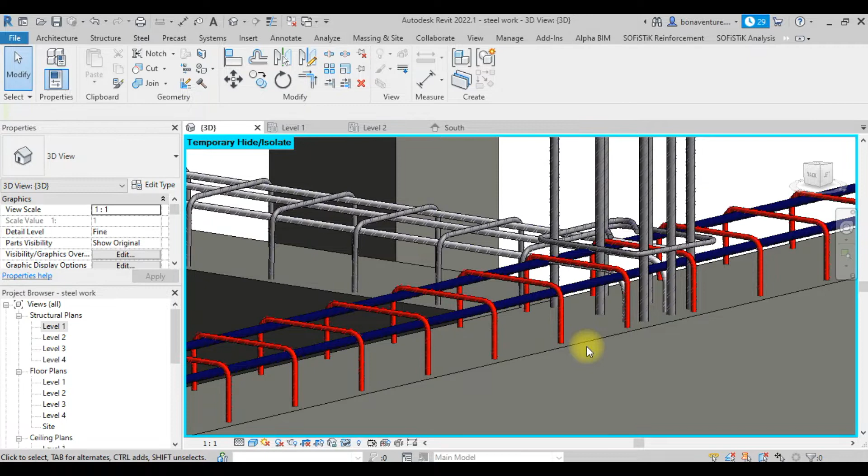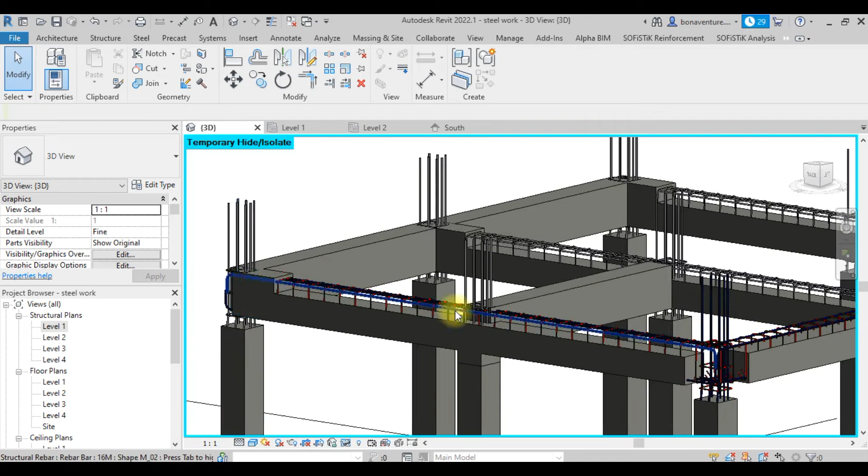Hi guys, in today's tutorial we'll be making use of Revit 2022 and we will concentrate on how to solve rebar visibility problem. Okay, so let's start. We have already modeled this particular little simple structure, so we now start afresh to make another model of this structure, you understand, and then try to know how to make these rebars visible as it is like this.

So let us open a new project. Control N. Okay, structural template, yes.

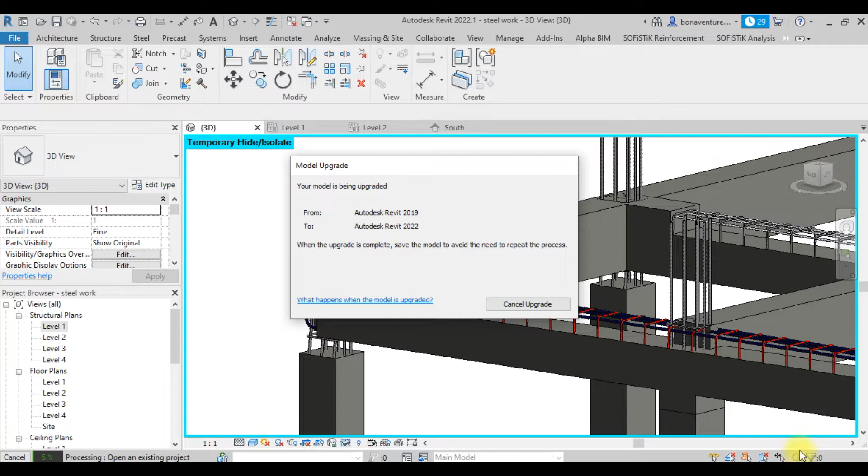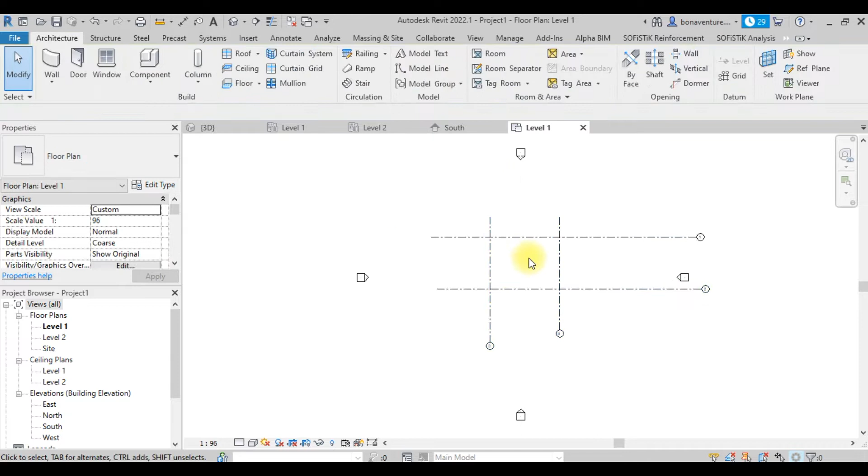So we'll now start with grid line, just a simple grid line. Grid line, come up. This, maybe another one, this, then this, okay, this. Very fine. So I don't know the dimension of this, let me make this 3000. Enter. Then this also 3000.

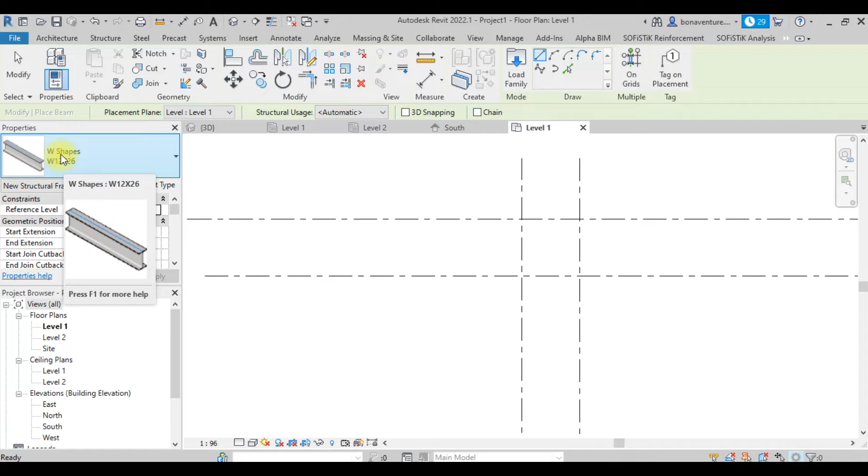Okay, enter. Now I don't need to be setting my levels, I'll be making use of this level 1 and level 2 only. So what I will now need to do is, I already know the beam I have here, they are the automatic beam, they are the default beam, so I will be loading in both beam and column, the concrete beam and column.

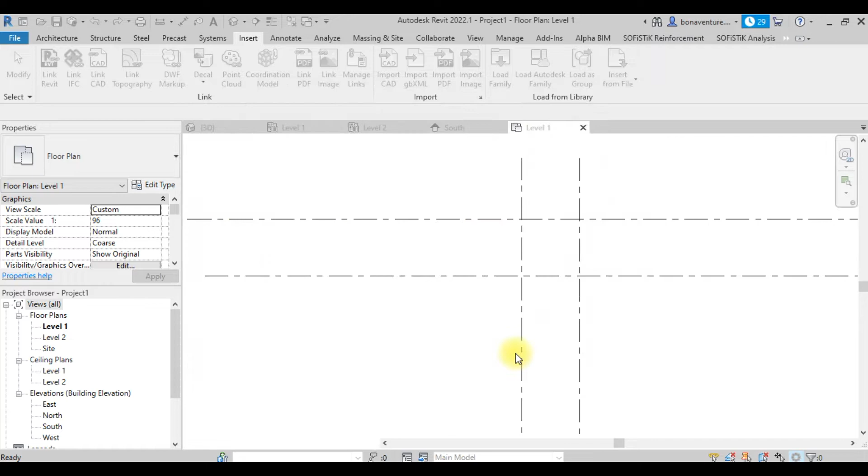So I'll come to this insert load family. I will now come to looking for structural columns, then concrete. Will now come to rectangular column, load it. Then you also come to insert, go back to beam, this structural framing. You now come to concrete, rectangular beam, load it.

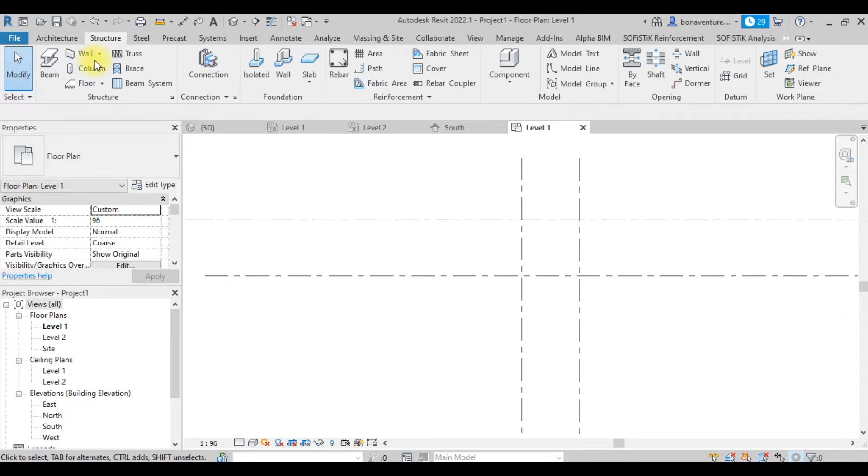So with these two things, I will go straight to put in my column. Okay, this is it. So I will just say at grid, finish. Okay, it's not visible at this place.

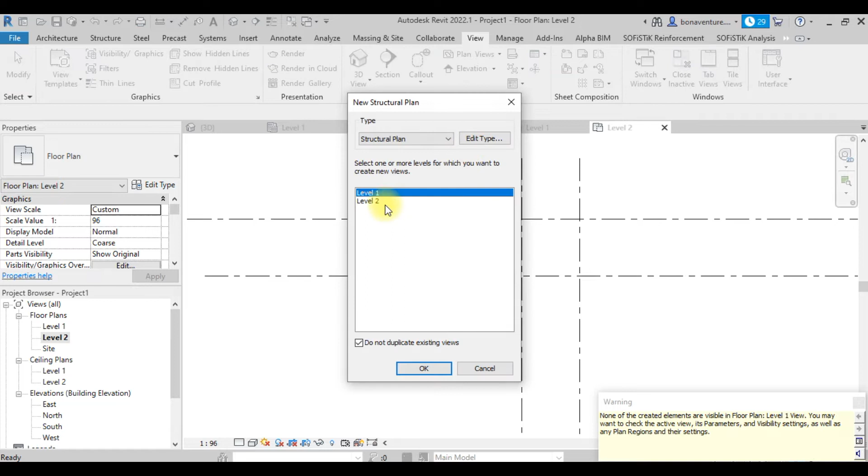So meanwhile, let me open my view, my structural views. So come to this place, you have structural plan. Okay, so select it to open. Now coming under this my structural plan, now we can now view our column.

So I want to just set up the column to be, let me say 300 by 300 millimeter. So say okay, and everything changes.

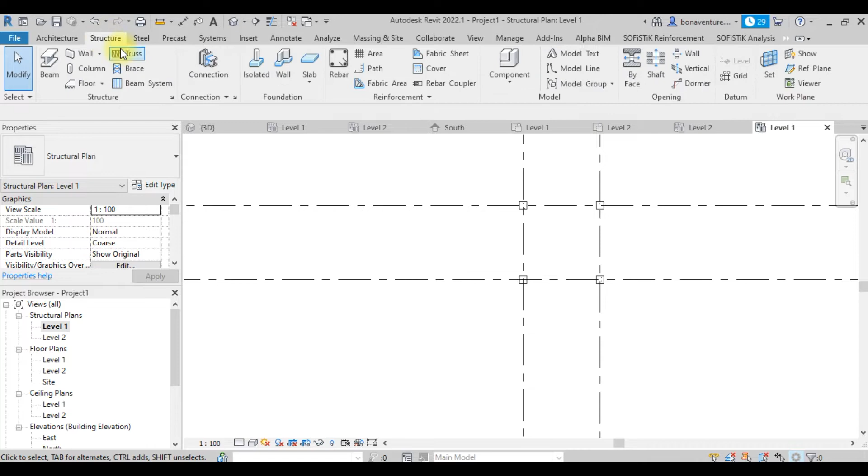So the next thing I need to do is just to put up my beams. So still come to beam. My beam, I want it to be 300 by 450. Okay, so I say okay. I want it on grids, run. Okay, so I'll say finish.

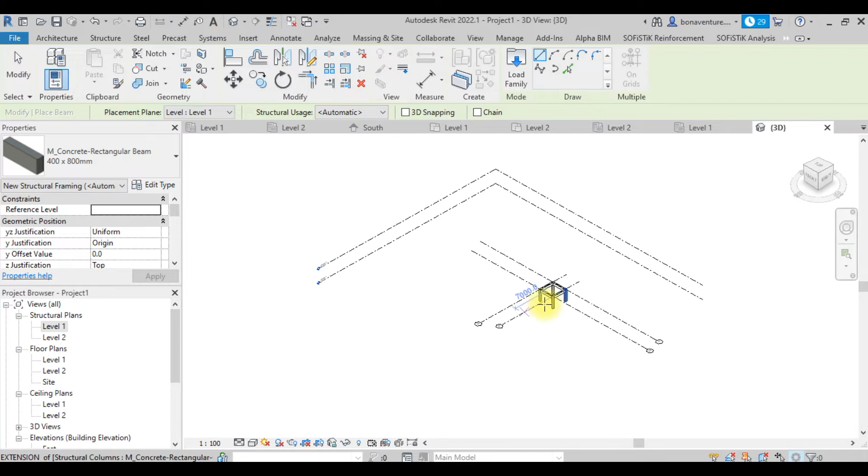So I'll come to my 3D. You now see how my column, my beams and everything has been inserted.

So the next thing I need to do is come back to this. I will now need to put my reinforcement. Now coming to this rebar, okay, I will need to load it.

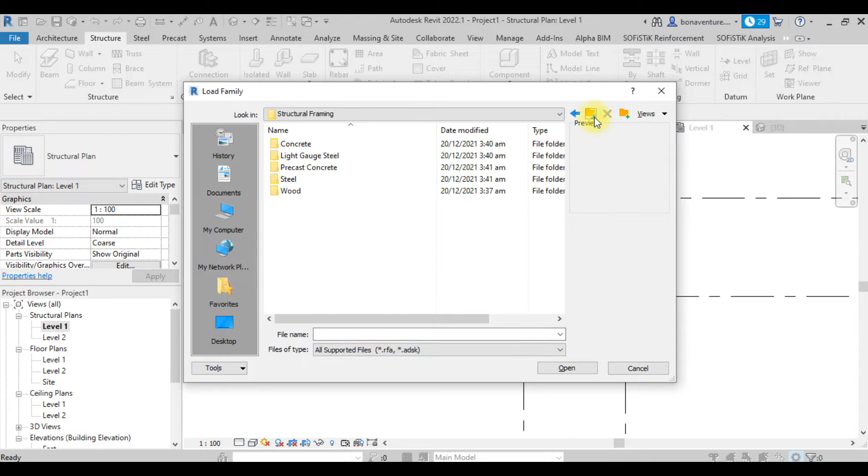So yes, I will now come to structural rebar, structural column, precast, rebar coupler, rebar shapes. Yes, so I will basically load everything. I don't want structural rebar, I'm looking for some, so I will just load everything. Okay, it has finished loading.

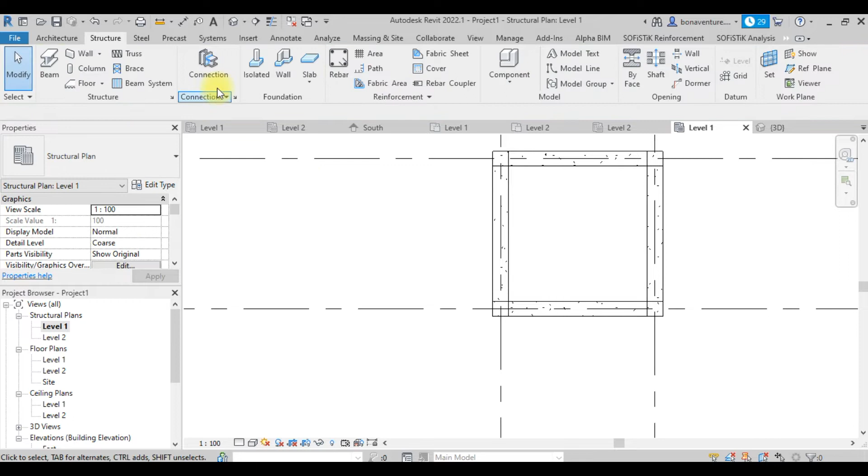So I will start with reinforcing my beams. So okay, escape. Now come back to this rebar.

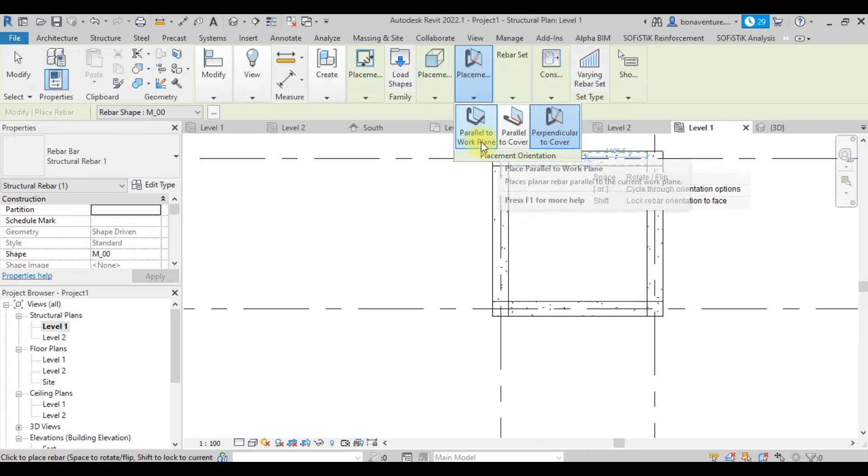Okay, now we have so many options here, and this is not what I'm trying to do, but for the beam, I'll just click here, come to this place. Okay, perpendicular, parallel to cover, parallel to work plane, parallel to cover. Okay, no, this is not it. Placement, parallel to work plane.

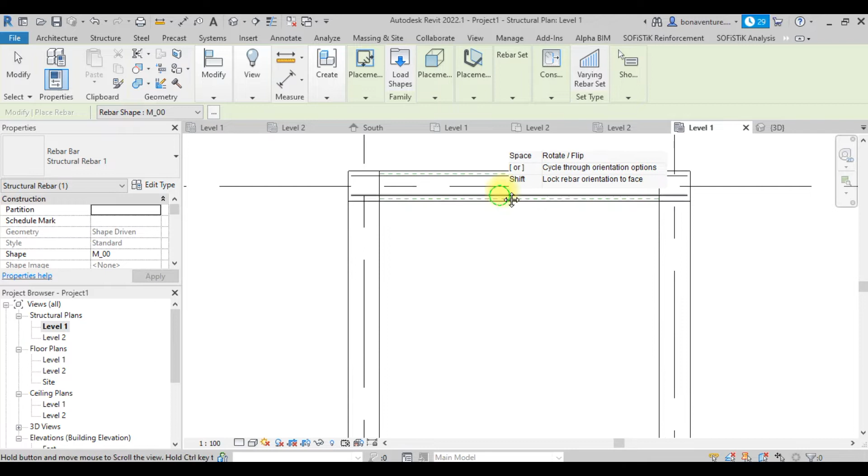Okay, yes. And then remember what I'm making use of is bar shape 00. So I will now come and put here, put here. Okay, let me just use this one for the meantime.

Now if I now go to my 3D, let me drag this out. If I now go to my 3D, put it under shaded, you'll find out that inside is this.

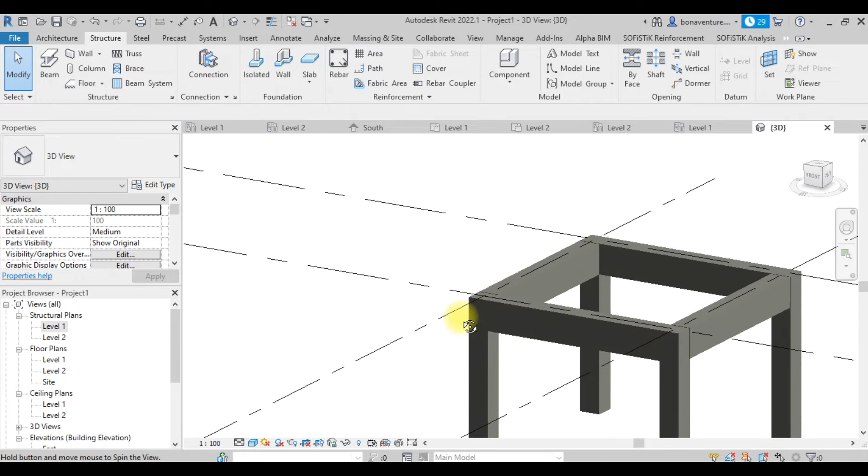Okay, I want to locate my reinforcement. So where is it? You see the problem? Looking for the reinforcement. Okay, look at it here. I think this is it.

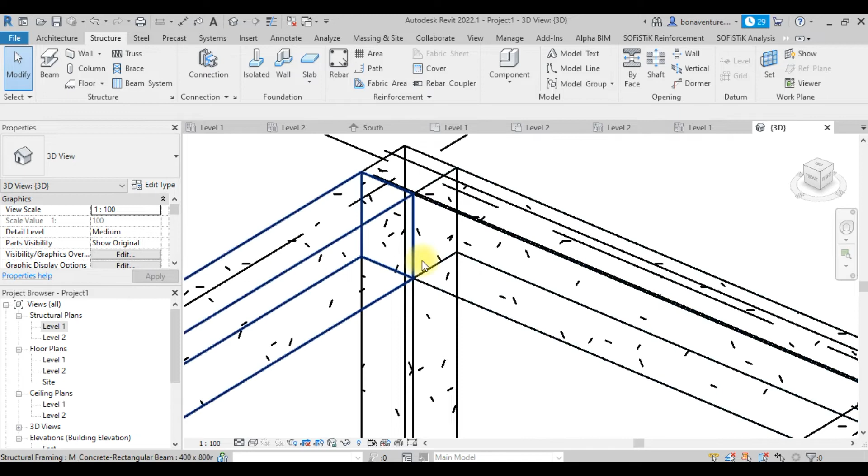You see, so everything just appears as a line, and that is a major problem that we normally see. So this is exactly what we want to solve. So when it happens this way, let me drag this out so that we'll be seeing it well.

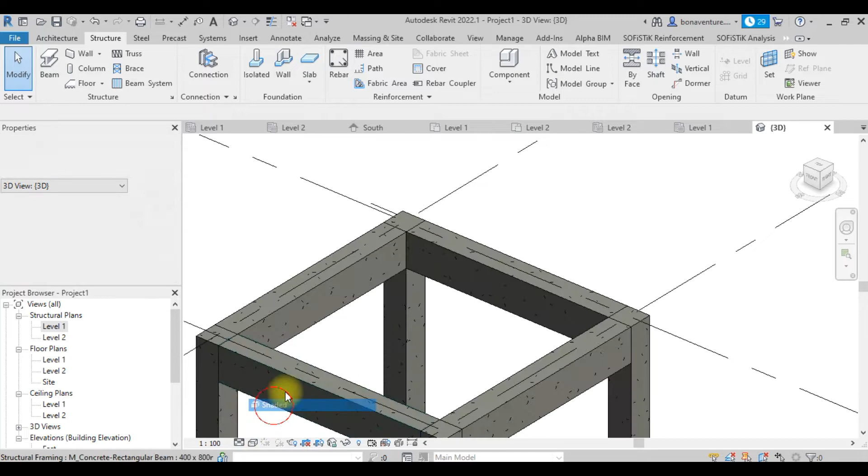When it happens this way, we have three things that we can do. First, let me take this back to shaded. Okay, and then this is the reinforcement. No matter how you zoom it, it will still be like a line.

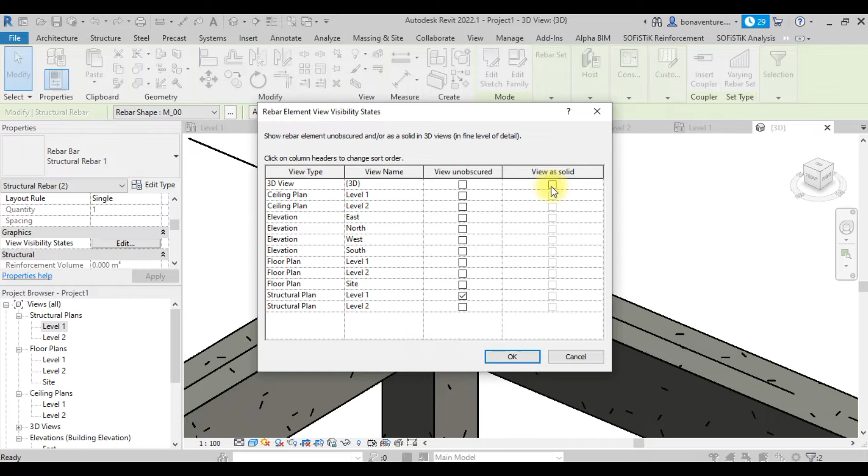So first, I'll click on the reinforcement. Let me just select the two reinforcements visible in view. Now I'll come to this property and look for where we have view visibility state, and I'll click edit. Then I will now click view as solid, and I'll say okay.

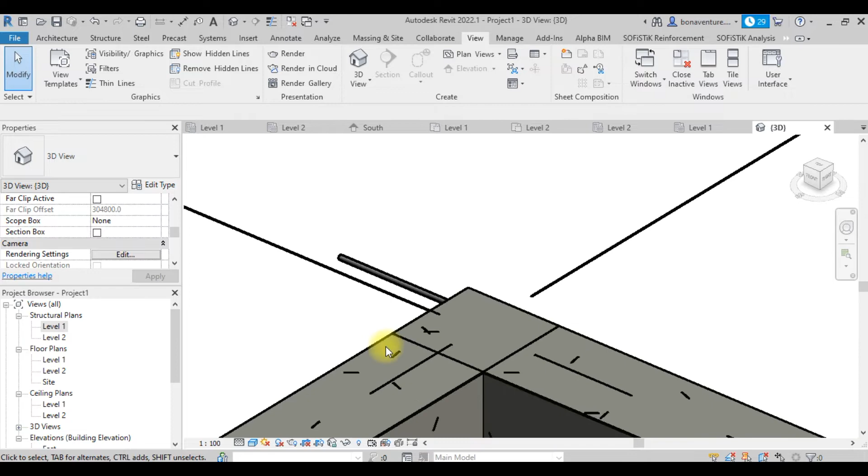Okay, so this one thing. The second thing you need to do for it to come out as the shape you need is come to this place and click fine. Now you see how the reinforcement is looking, but there's another problem. If you look well, the outline of this reinforcement is too thick. So what do we do?

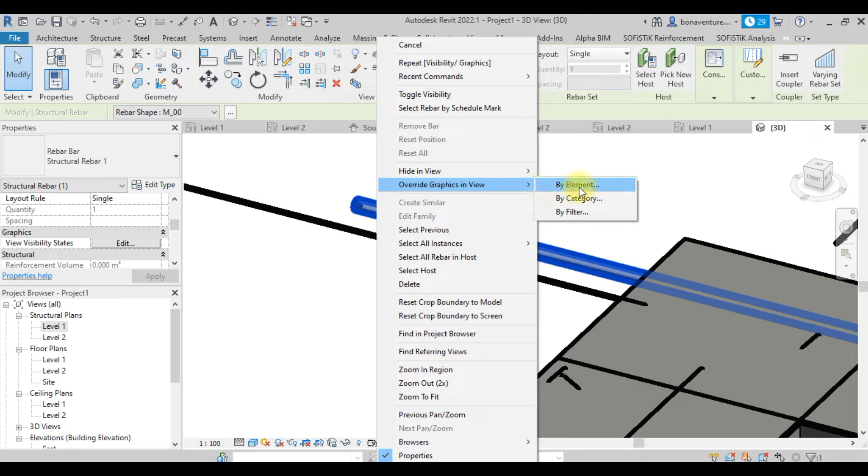What we need to do is click this particular thing, select all the reinforcement, override graphics in view, then enter. Let's start with this by element. If you come to this page, there is what we call the projection line. Come to this projection line, then under weight, go to by object weight, click on one.

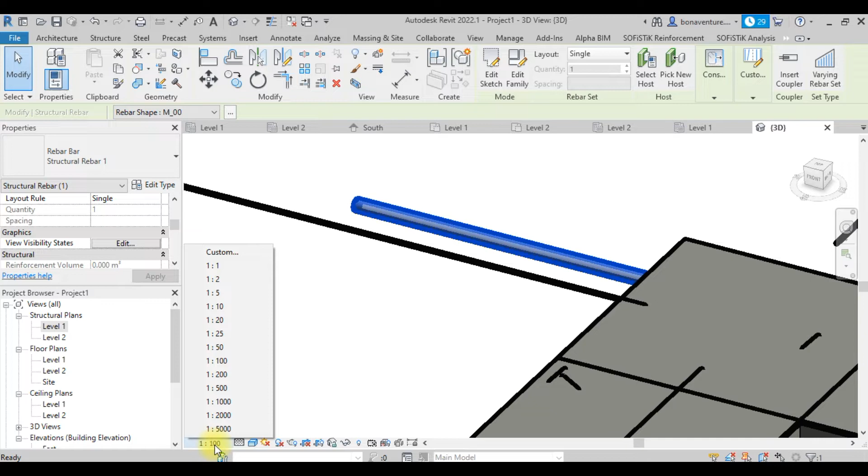Then there's also another thing you need to do, because this is not where it ends. Come under this custom, the scale itself, change everything to 1, and you'll find out that automatically everything will turn very fine, as if it's rendered. So put this under wireframe so we'll be able to see these two things clearly.

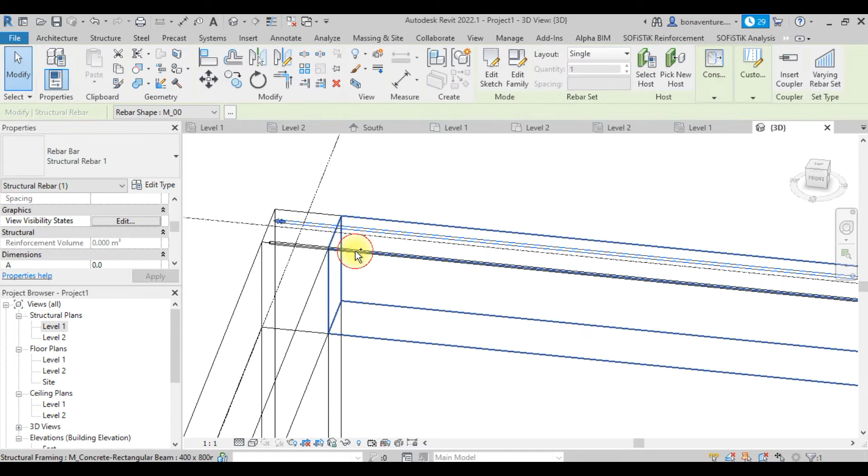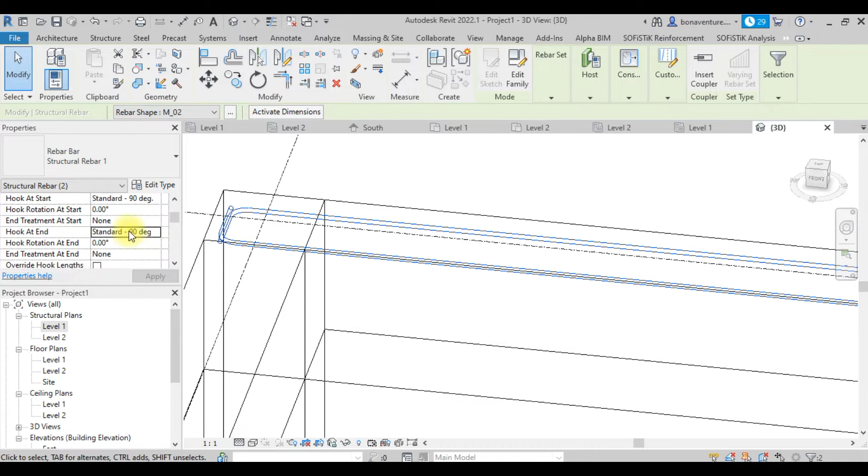Let me make these two reinforcements, coming under here, the hooks, 90-degree standard, then hooks at end standard. Make this 90, make this 90.

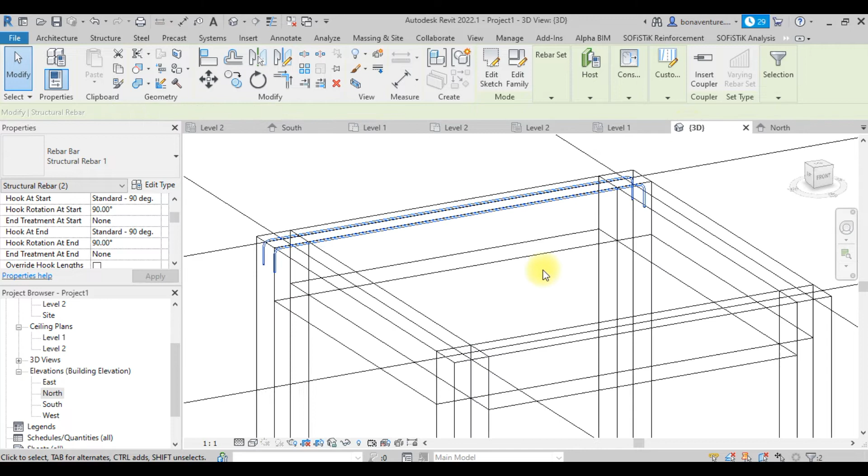Now let me go to north. Am I supposed to be under north? This is west. Okay, go to west, and then make this the same way.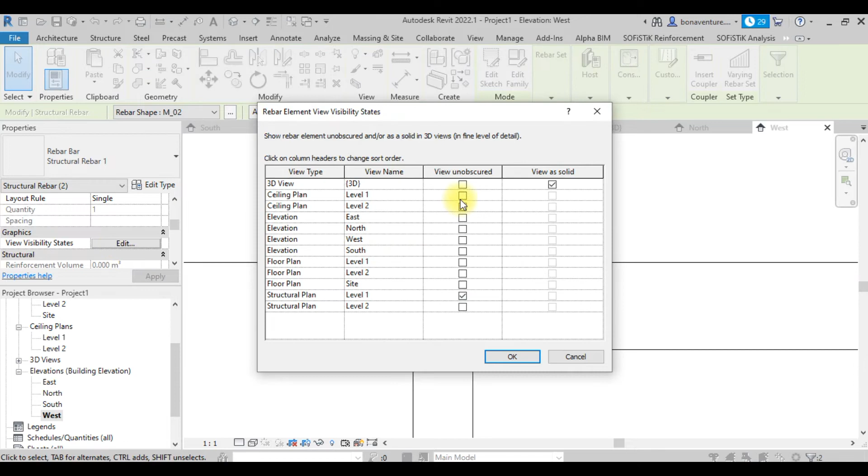Sorry, this is not wireframe, so I'll be able to see the reinforcement. Maybe I can also edit these, still under solid. No problem. Another thing I need to do is make this reinforcement come down, so I'll come under this.

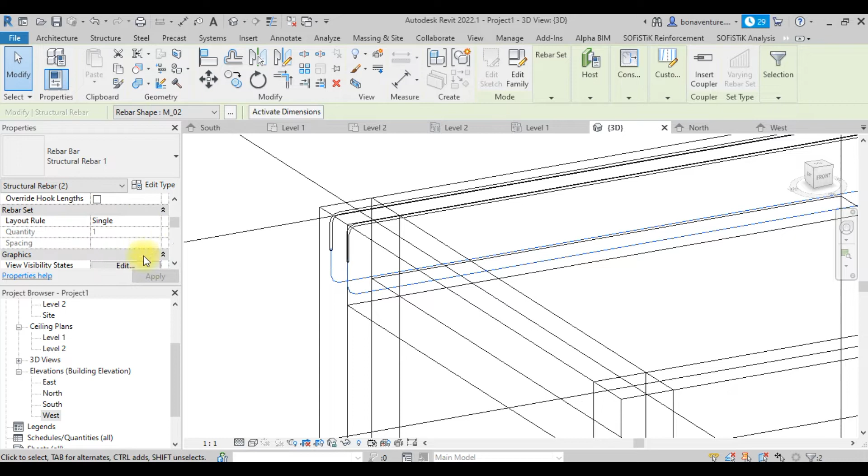Okay, so it's not double. Come back to 2D, 3D, select the two, visibility, click on solid, and then this.

So the next thing, I want to remove this from visibility, this particular one, I want to put it under shaded. So what I need to do to make the reinforcement clear, I'll just click on this, what is it called, face.

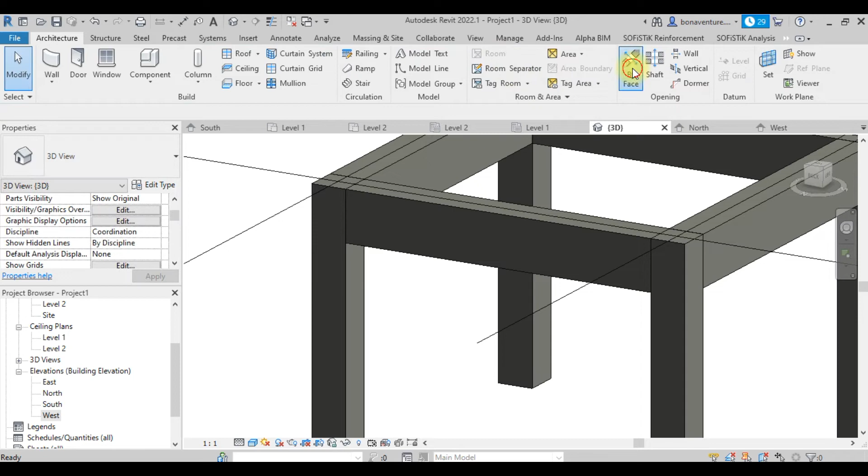So boundary line, cancel by face. I'll pick up this, keep this well, and maybe start from here and keep this way. Okay, I can now see my reinforcement in this way.

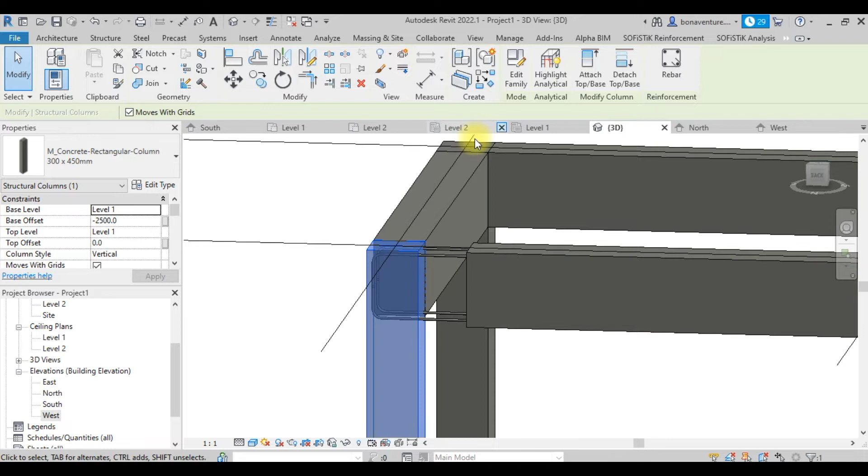Then maybe under this tail also. Okay, let me leave this particular one. So let me put up the reinforcement for the columns.

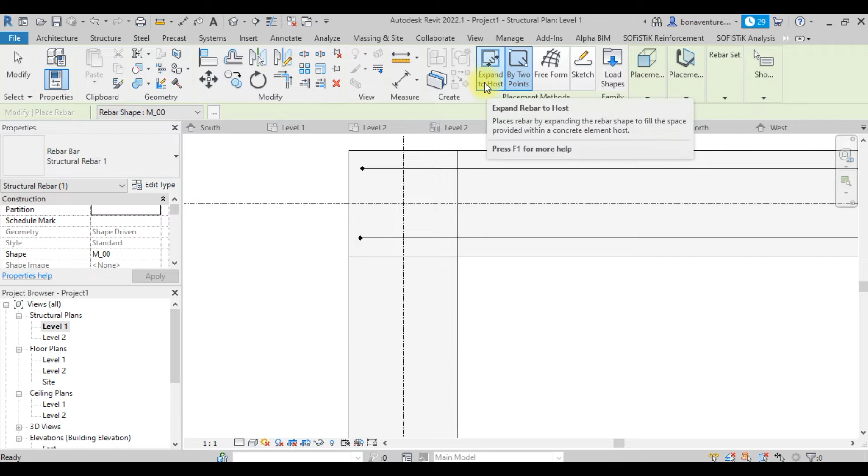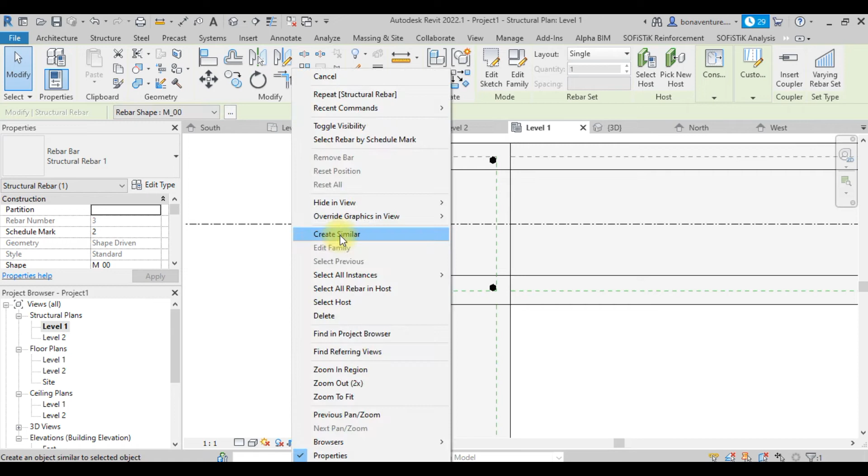And it happened that select all instance visible in view. I want to make all this to be Y16. Okay, very fine. So these are my reinforcements for the slab, for the column.

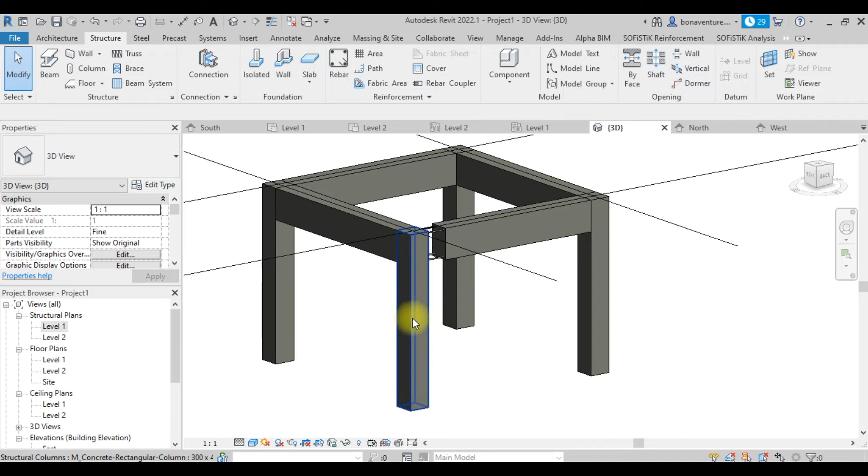Now, but unfortunately, we cannot see it very well. So what we need to do in this case, I think this is where it is. Am I right? Put it under wireframe. Where's the okay? Look at the rebar here.

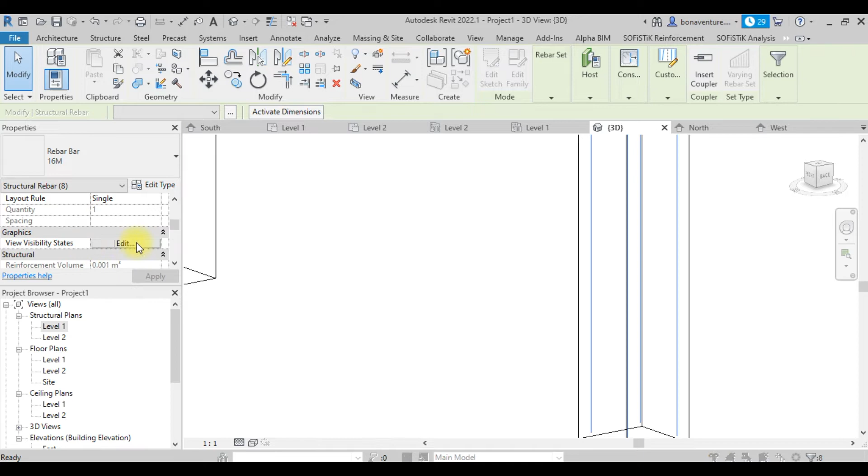So select all instances in entire project, come under here, under visibility states, put it as solid.

Okay, so the next thing I need to do is drag some of this up. Drag them up. Okay, very fine. Let me put it back to shaded.

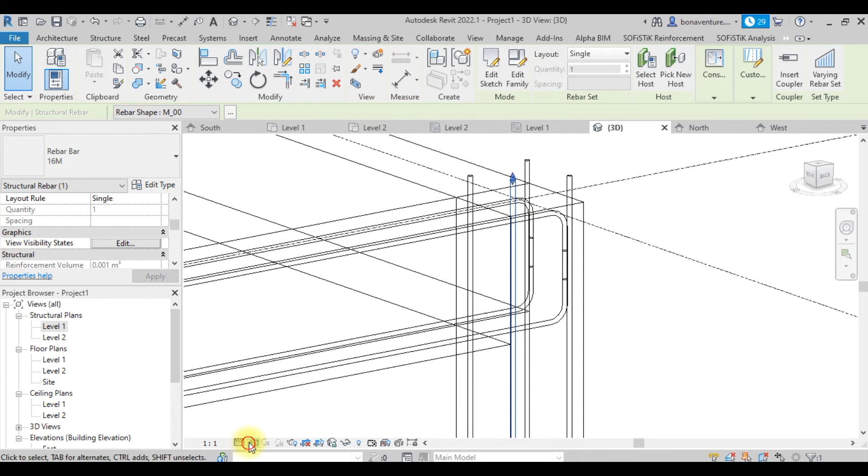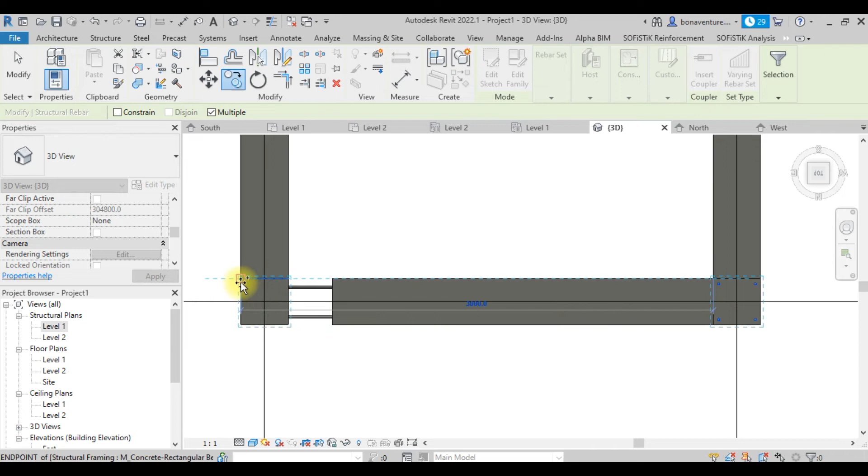Okay, now I also need, maybe let me copy this tray and then place it on this side.

So I also need to select all visible in view. Go back to this place, view as solid. Okay, so with this now we see another problem.

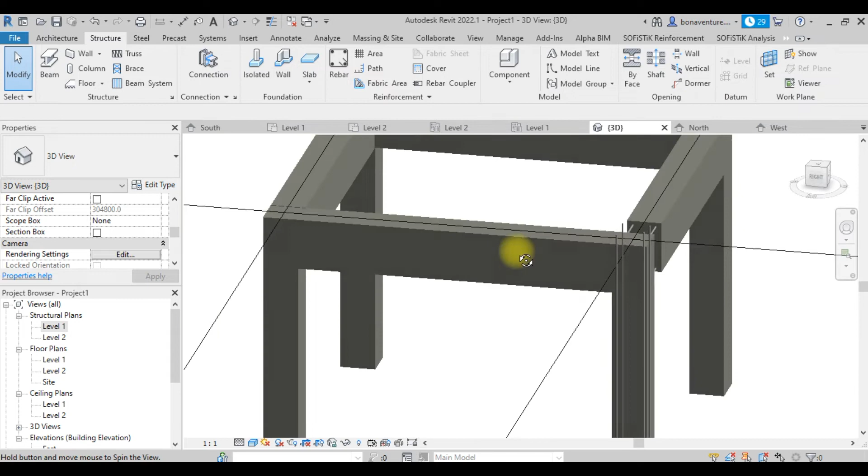You see, the reinforcement is no longer showing as if it is inside the concrete column. So there is another problem that sometimes we normally see in visibility. I want to select all the reinforcement visible in view, then go back to edit, come to this unobscured. Sure, let me go back.

If you click on one of them and come under this place, you find out that this thing is ticked, the view is unobscured. So if you untick it, you find out that it will now be embedded.

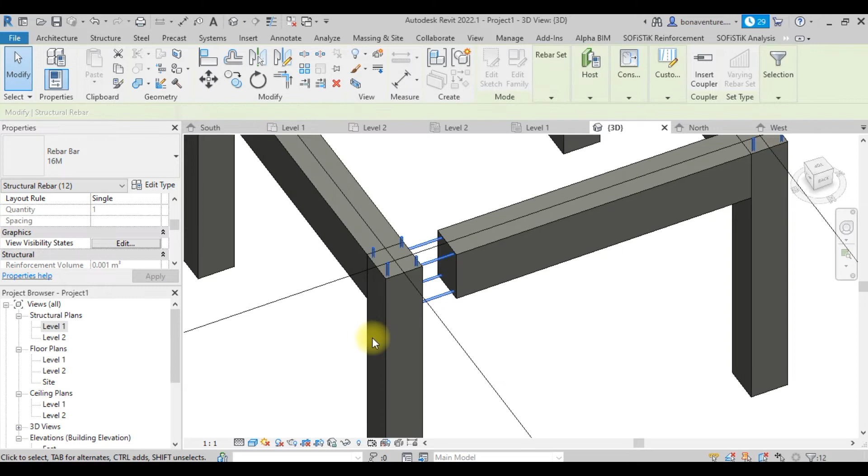So what I need to do is just select the affected ones, or all the reinforcement. I can even select all the reinforcement visible in view, then come under this edit, tick and untick, go back, and enter. So this is another problem that we have already solved.

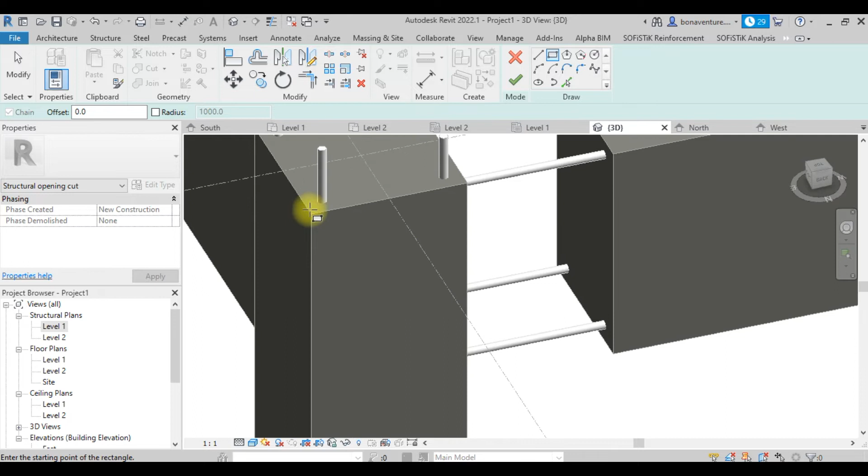So I want to be seeing part of this particular column, the inside. So let's go by face. Okay, so using this, this way, set enter here. I want to be seeing part of this. Okay, go back to our plan.

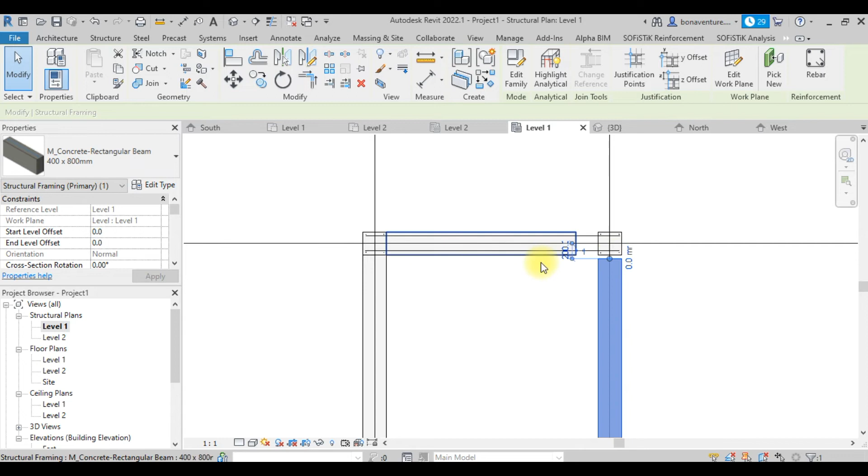So let me just leave this beam this way. I want to be seeing this reinforcement here very clearly.

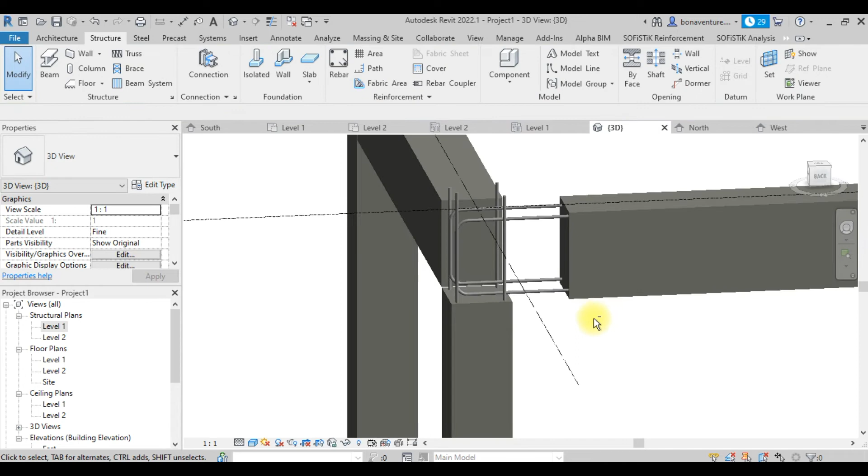Okay, what is it? Part of my beam, edit. Okay, so now these are my reinforcement. I see how clearly it is showing. So let us put in our, what is it called,

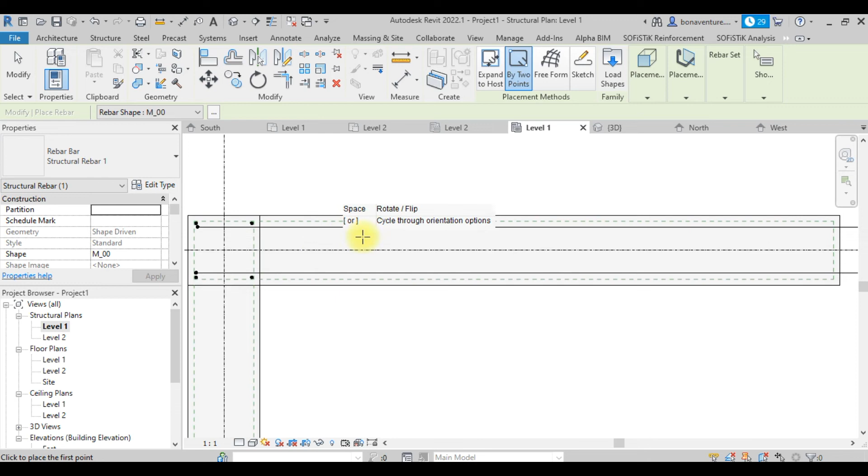our stirrup, by points, okay, parallel to work plane. Placement vertical is parallel to work plane. I think this is supposed to be okay.

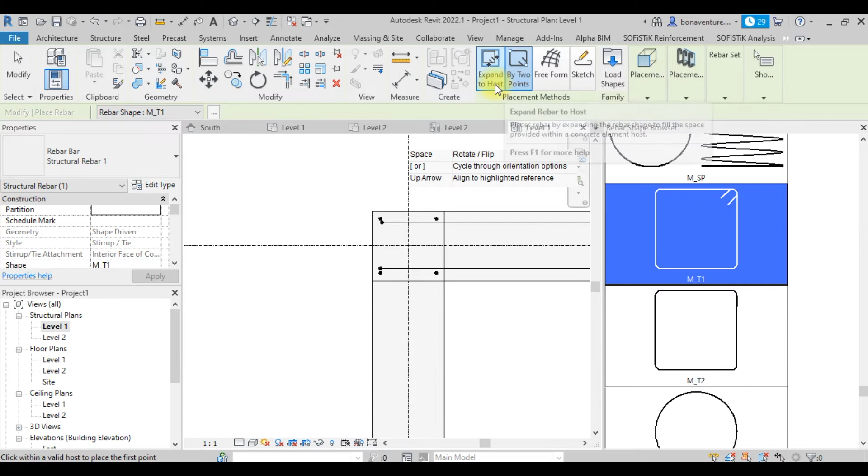Let's select the particular bar shape we are talking about, rebar shape. So coming, okay, let's choose this and then expand to host. Assuming we now put this, click on this, then

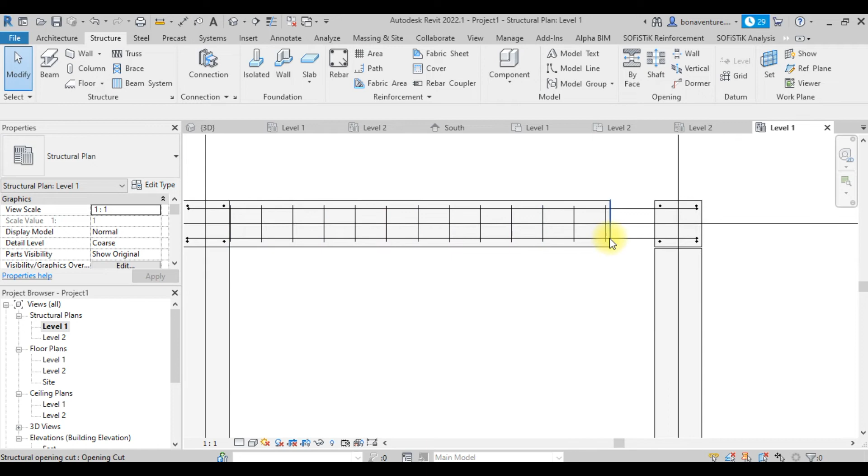fixed number. Let's use by spacing and choose 200 as the spacing. So we now have this. Okay, so let's go back to our 3D and then maybe by face.

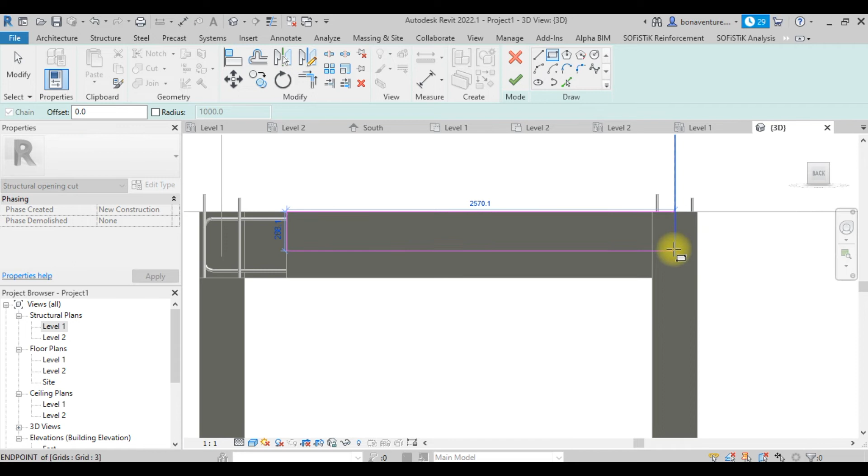I want to be seeing my rebar. I want to be seeing... okay, now very fine. You can see our links.

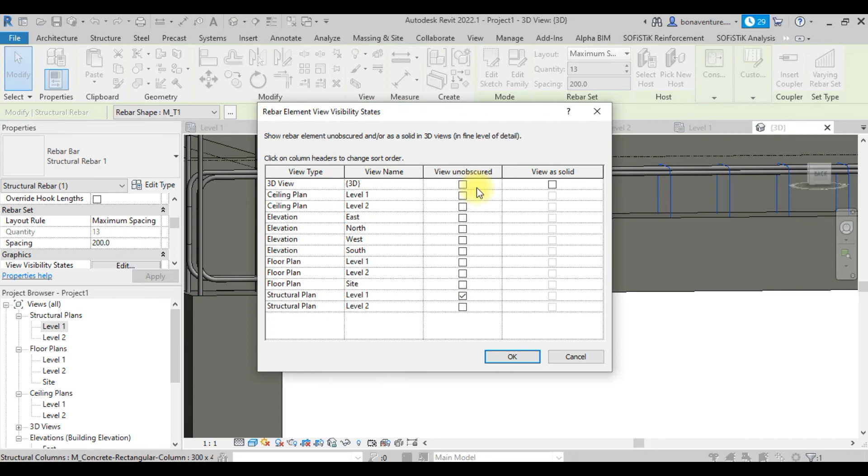So we need to make it have this kind of shape, not a straight line. So we still need to do the same thing we have been doing. Coming back to this edit, view as solid. Okay, so it will now turn back to be in this form.

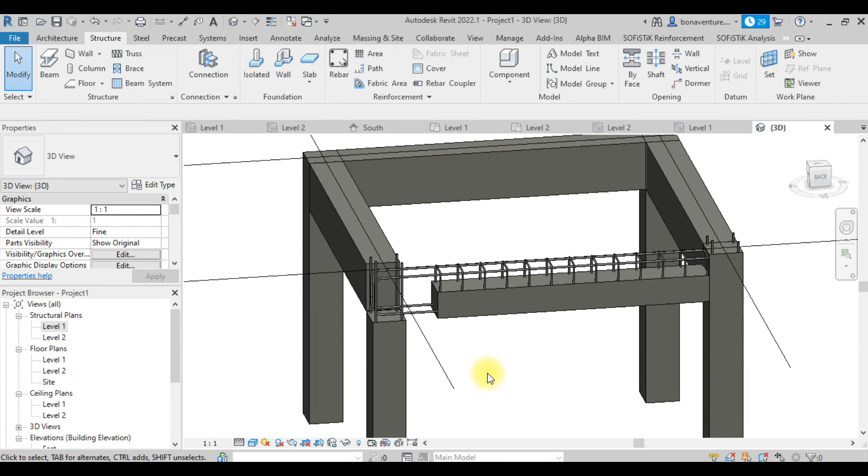Now adjust this. Adjust this. Okay, let's just continue. So assuming this is what we want, okay, but we want it to have a bar,

as if to say it has what's called the shape of reinforcement, having a thread-like stuff. So what we need to do is select all these. Meanwhile, I want this bar shape to be 10 mm.

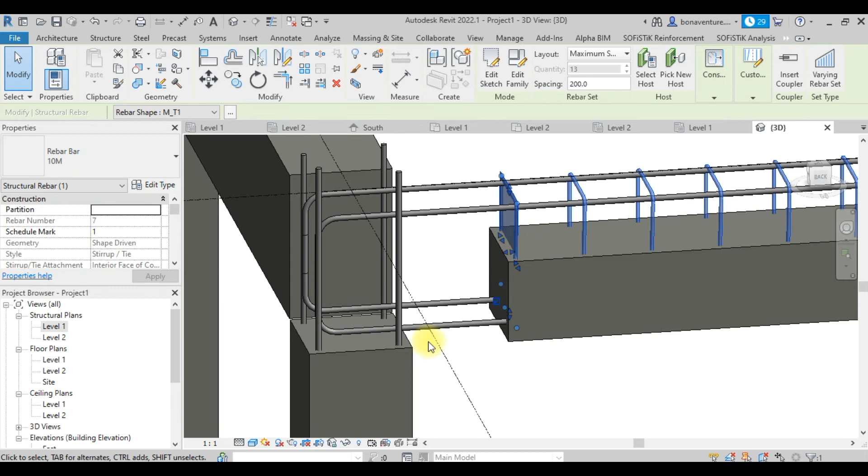So what I need to do is select this particular reinforcement, select instance, select all. Now come under this override by category. Under this project, under surface pattern, choose this to be steel. Then come under background and choose solid fill. Let's forget about color now, just solid fill.

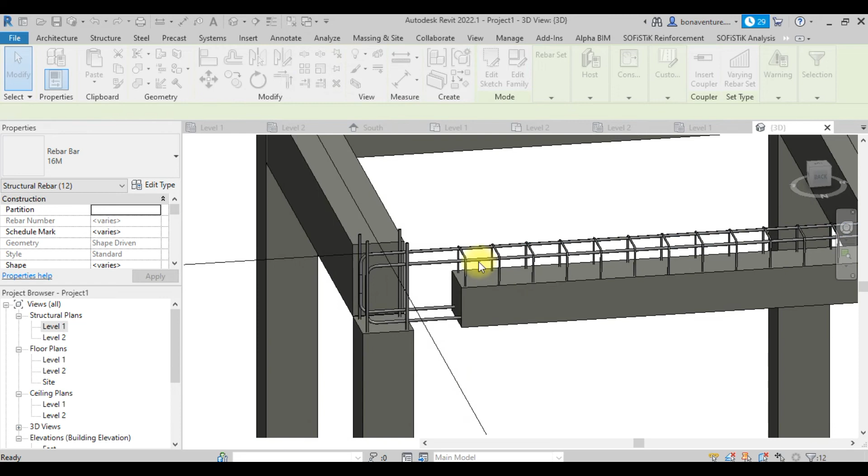So the reinforcement shape will now be like this. Say apply. Okay, it's not still appearing. Okay, let's go back. Select instance in entire project, visible in any view.

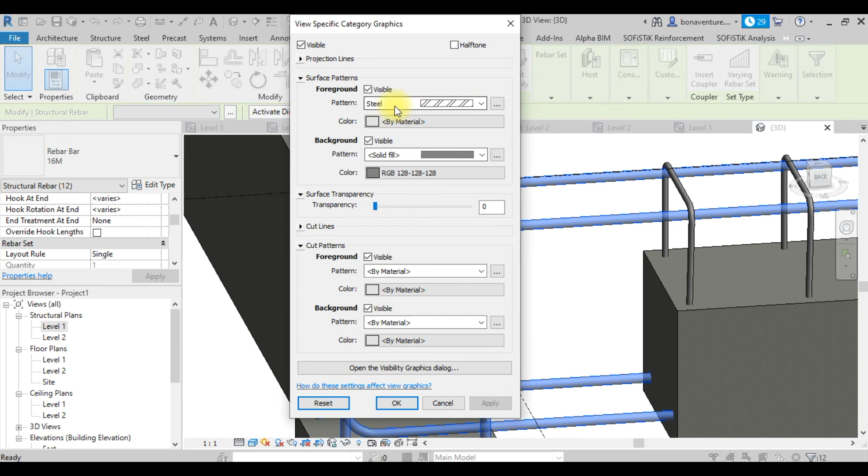So we'll now override by category, still yes, by view. So what we need to do is go back to this, under steel pattern, move to this place and change the scale. Maybe make use of a scale of 5. Now say okay.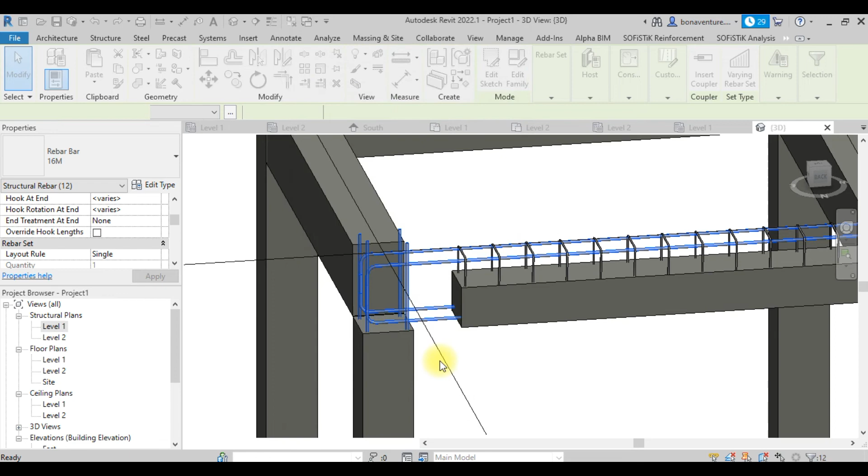Now you can see it has the appearance of steel. You can now see it. So now if you want to change the color of this particular reinforcement,

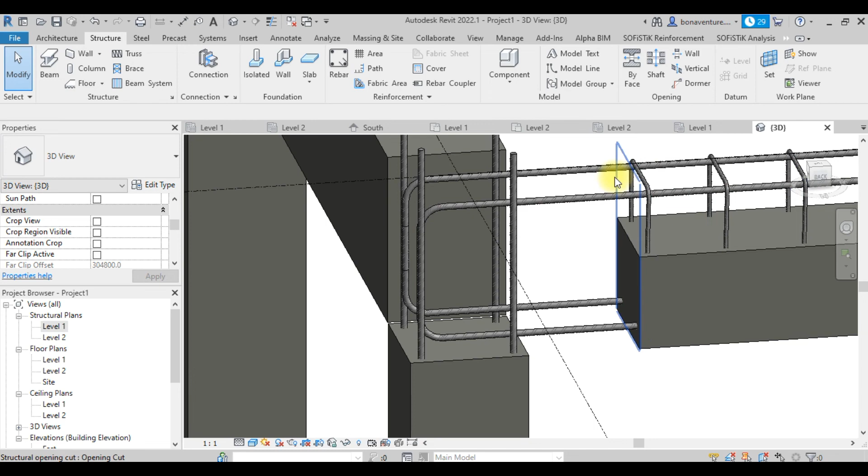maybe you want this one to have the same color, and these links to have a different color. Maybe select, let me just use this.

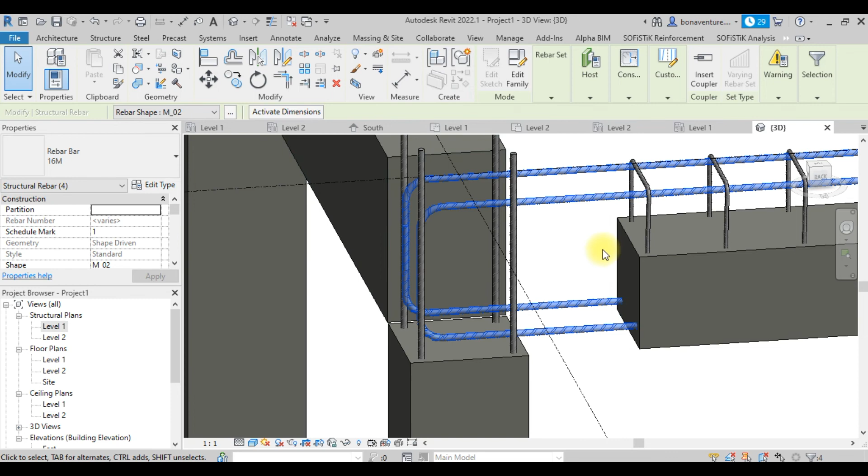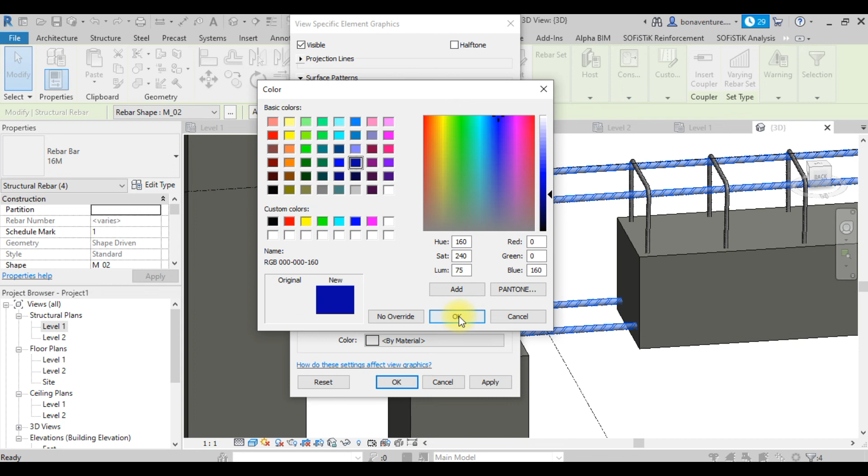Okay, so let's go with this. Then under by material, you choose solid. This is even where you need to put the colors itself. Maybe you can remove this. Now we click apply. Okay, you see the color will now change automatically.

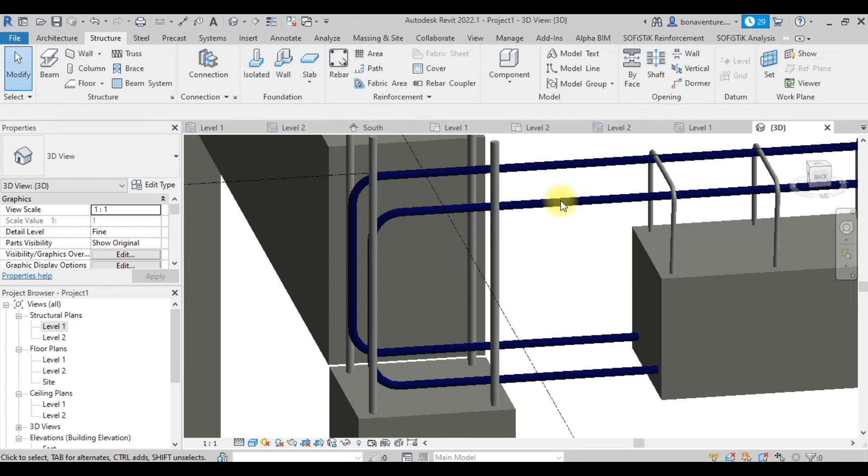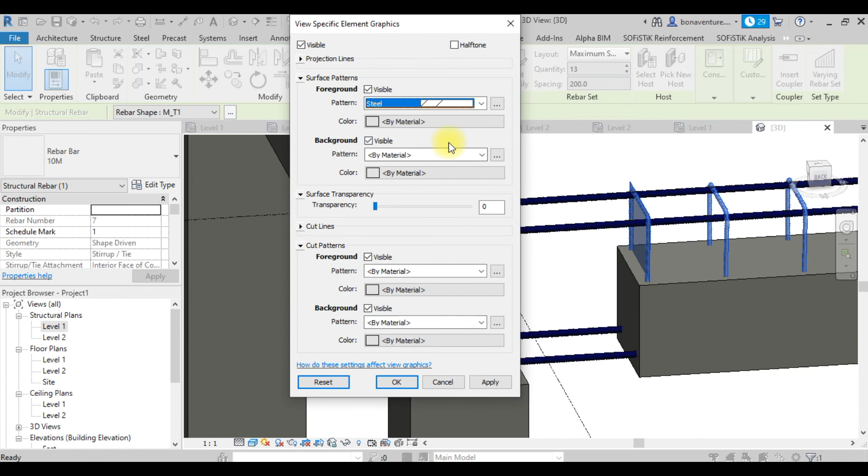Okay, if you come down to this place, you choose. Now you need to choose the color. Maybe I choose red. Okay, good. Apply. Okay, so this is basically how you can always change this.

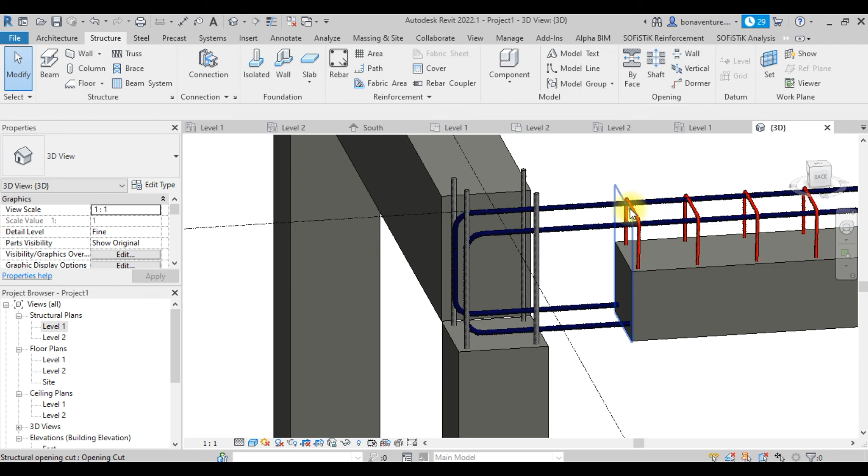So I think with this we'll now come to the end of this tutorial. Thank you.